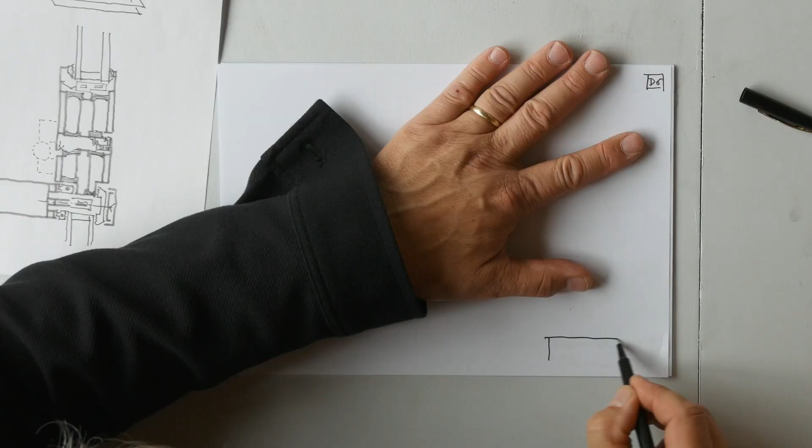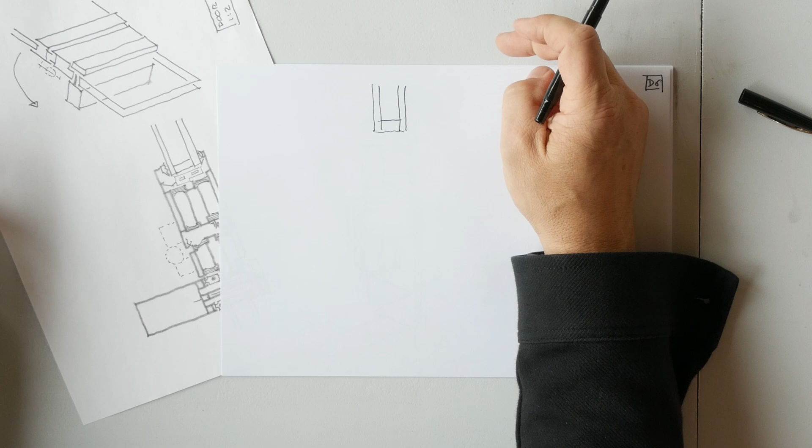First thing we do, after giving it a name, which is detail number, what was it? D6. Door. Detail 6. First thing we do, we start with the door detail. So the door detail which we already used in our setting, and we assume we start somewhere here with the glass, and it comes down like this, and then we place the door detail

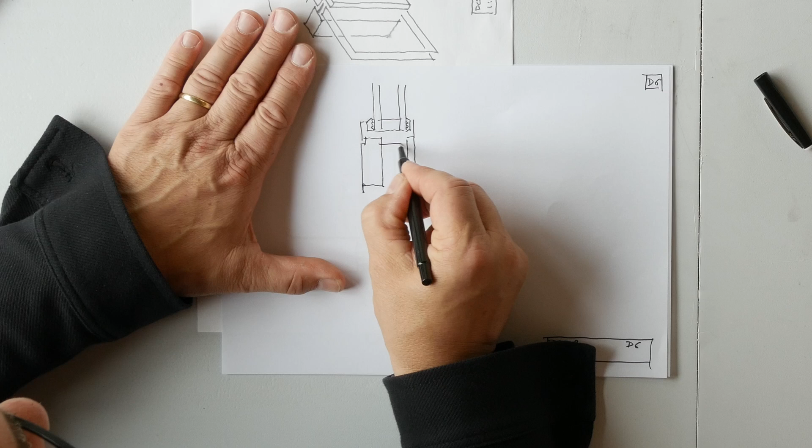as we're supposed to use it, and it actually starts with the sealant, of course, a profile, and again we simplify the whole thing. Just the contour line in principle. It's fixed in here, and it comes with this and this. Then we have the spacer, and I think there's a second one in here. Okay, this gives us the principal idea of where the door sits, and now we need to seal it.

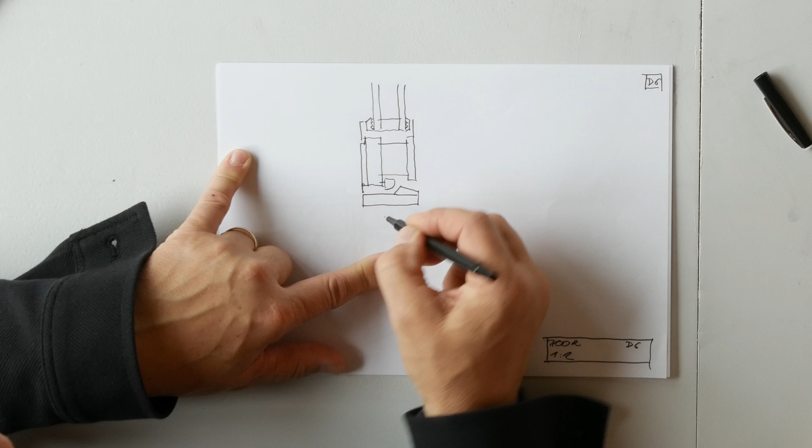Now what we have is, in principle, the door frame is on the two vertical elements, and the top horizontal part is one profile that is just cut on the mitre. Underneath we have a different one. It's the door sill. It has a different requirement because people are actually walking over, or you have a little wheelchair or whatsoever. So therefore this is a different detail. And also we want to make sure that no water can come inside.

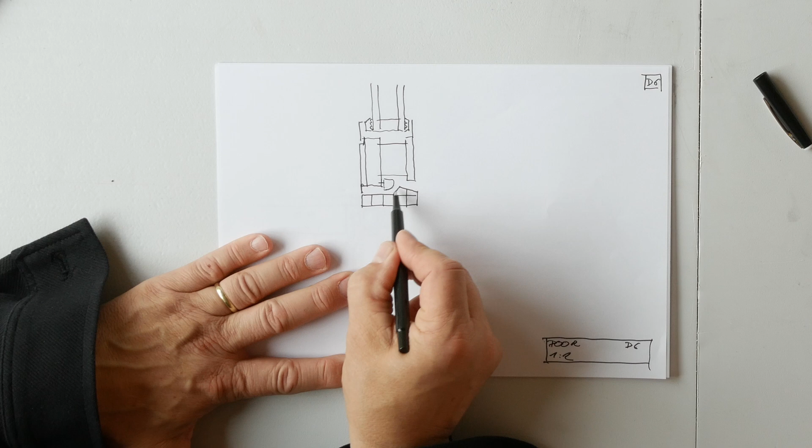Outside, inside? Outside, inside, precisely. Moving to this side, so it needs to be flush here. We need to have a barrier against outside water, because if it rains and everything goes wrong. And then it still needs to be sealed. So we do it here with just one layer of getting it sealed. So this is the principal system. Again, this is something which we take from the catalog, so we don't develop it ourselves as a system.

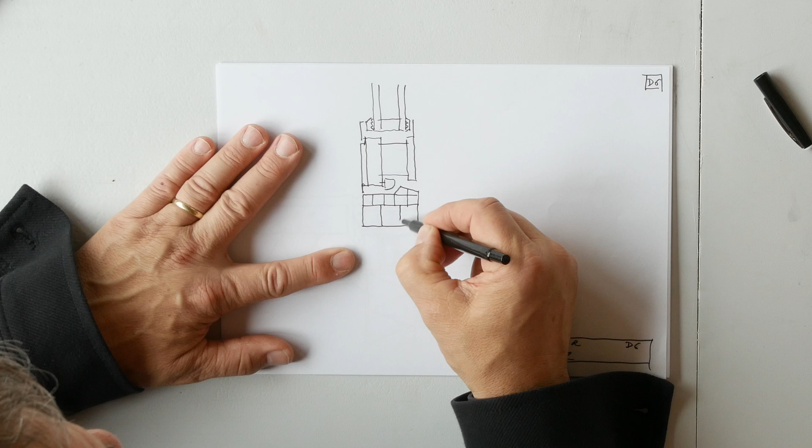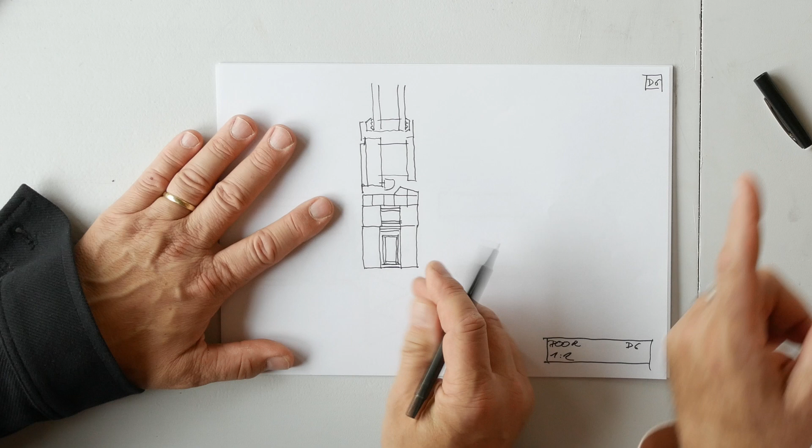And then this piece, which in this system is out of plastic, needs to be brought in position, so there's going to be a solid part with some space. This is often also an aluminium profile. Exactly. It may go down deeper, and for being rigid, it may also end with extra support components. We have seen, for instance, extruded plastic profiles with an insert of a steel rectangular tube in order to make it very stiff, so in case you walk over, it doesn't bend through. And then we like to have it flush.

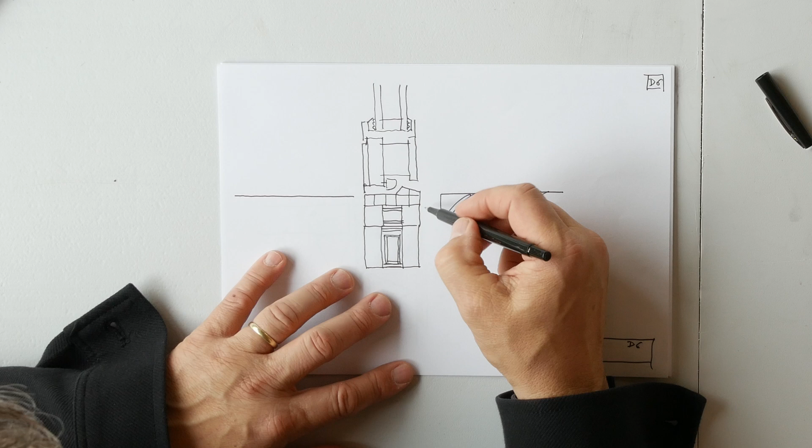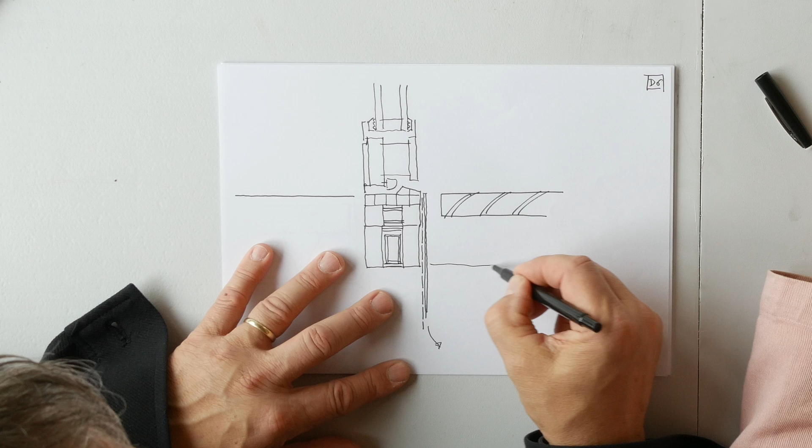And when I start drawing the outside, I may have some kind of tiles, natural stone, whatever, as an outer layer. And then we need to, as usual, seal the whole thing. And then drainage needs to find its way out here. We may cover this with a plate, laminated, so that the foil itself is not corrupted. And then there's gravel, ground. And here's also sand or something, whatever you want to place. Not our piece of cake, but something has to happen there as well.

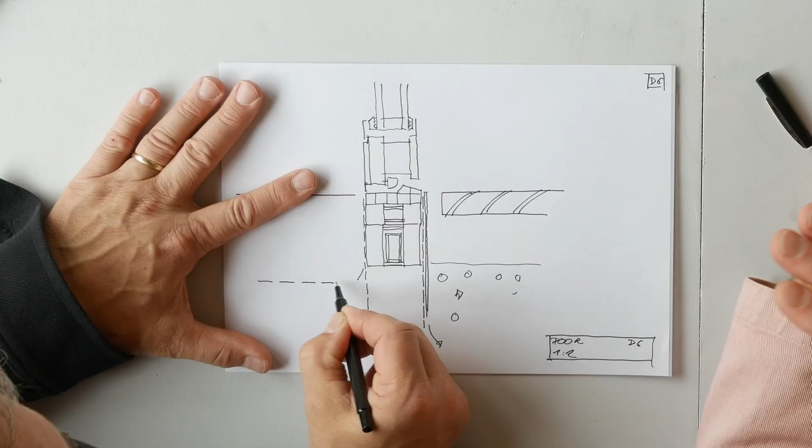And then we need to get this sealed from the inside as well. So it's actually sealed here. And the trick is that you don't have the bottom part of the standard facade running through. It stops where the door starts. So underneath the door, there is no horizontal facade beam. That's pretty much the point, because otherwise you would always run over it, and it's powder coated, for instance. You wouldn't like to have scratches and sand on that.

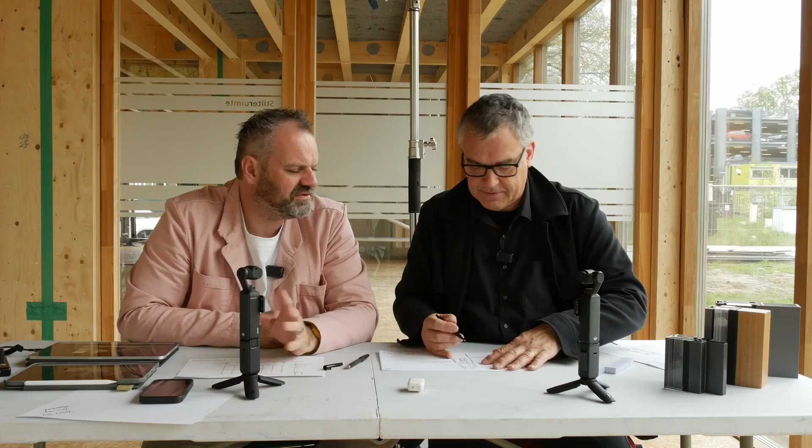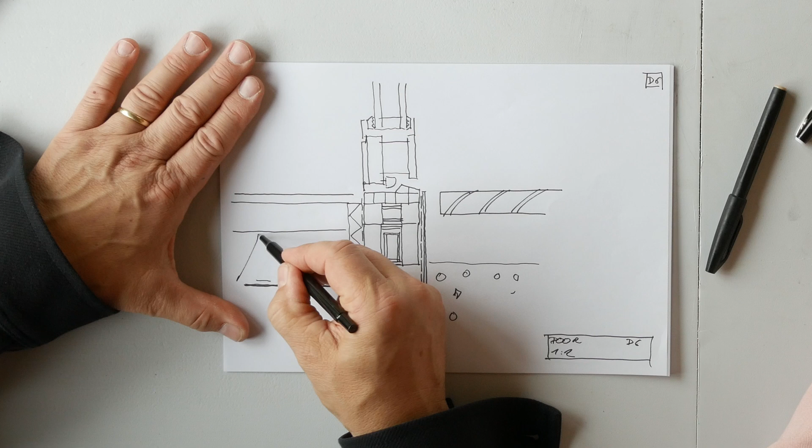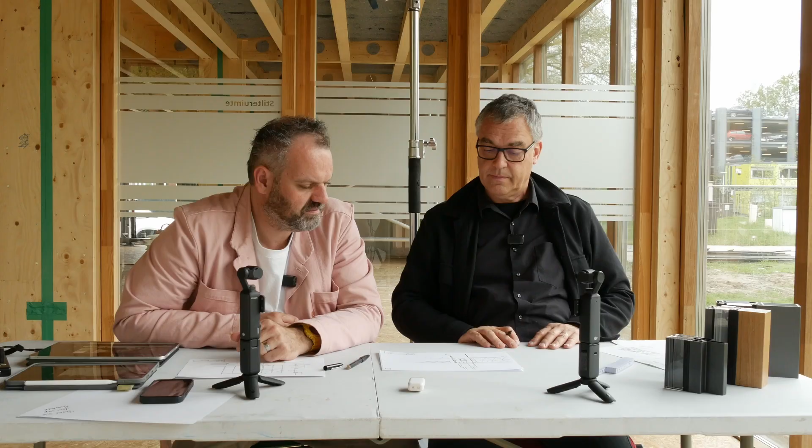And so this is drainage. Rain finds its way. This is airtightness at the inside. So we fix it to our bottom profile of the door, and then it's fixed here. And then the same floor build-up as we already knew it from the previous sketch, which was some kind of hard insulation here, some hard insulation here, and a mineral-based floor, some kind of cover, carpet, a bit of silicone, and that's it. Precisely. I missed some insulation here.

And here it later also has to be developed with a landscape architect maybe. You may also have a drainage system here, this slit drainage, very slender, very small. It could also be a gutter, right? Precisely, a gutter, and then it's flush.

Marcel, I'm not going to be able to do this three-dimensional because of... Yeah, there's no... I don't insist, but I think it's good. Thank you.